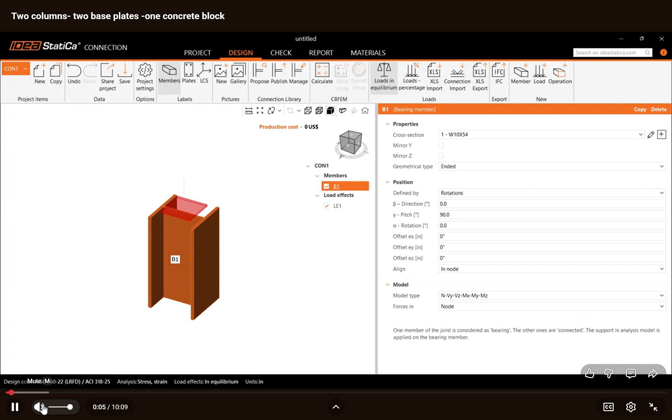This video will show you how to do that type of connection with two base plates related to a different column. So first of all, I'm going to create this channel.

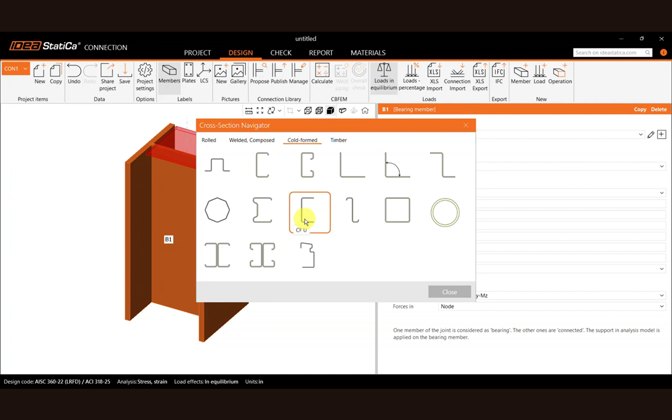I can use the cold-formed. It looks like it's a cold-formed. I mean, it's not going to select a cold-formed steel material, but at least we have some shapes here that you can use. I'm not sure about the exact dimension. I'm going to just use this one here, probably 8 and 4, but you can always change

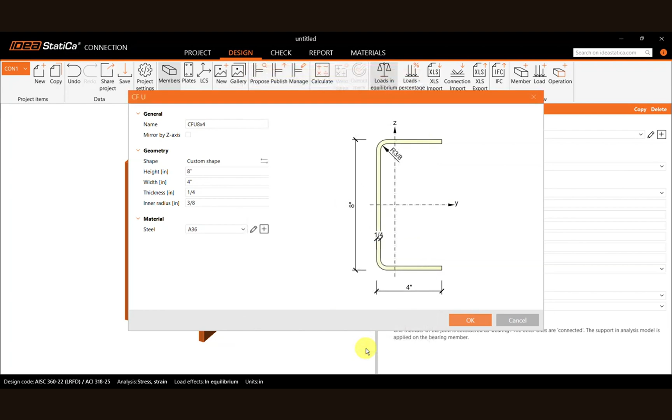this member shape, right? So you can also come here and select the appropriate material. I'm going to select A36.

Okay, so now we have this column here. So I'm going to copy this other column and I'm going to just rotate it. Actually, I'm going to use a mirror option. Okay, so both of them are located in the 0, 0 position.

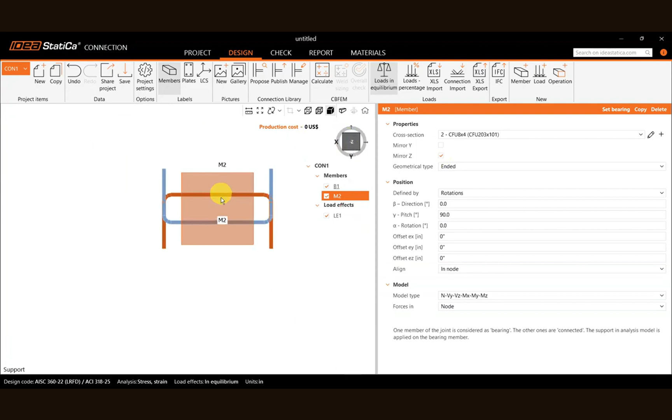So what we can do here is either if they have a space or they don't have a space, as shown in that picture, but you can just use this offset to move these members to one side and then to the other. So my recommendation is that the working point is always at the center of the two of them. So I'm going to move M2 2 inches and then B1, it's going to be -2.

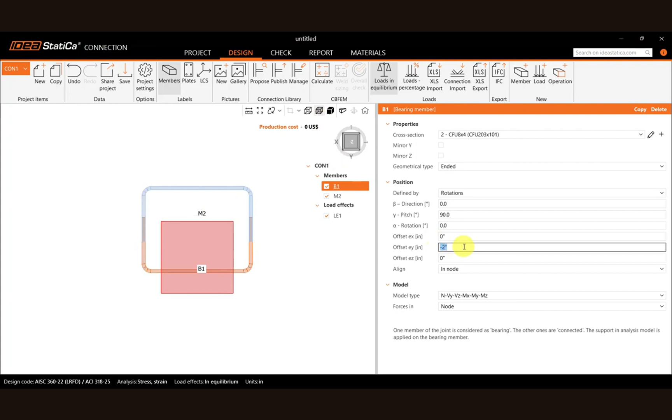So probably we'll need more, -4, and then the other one 4, 2. So depending on the space that you have there, but my recommendation is that we keep the working point in the center, okay?

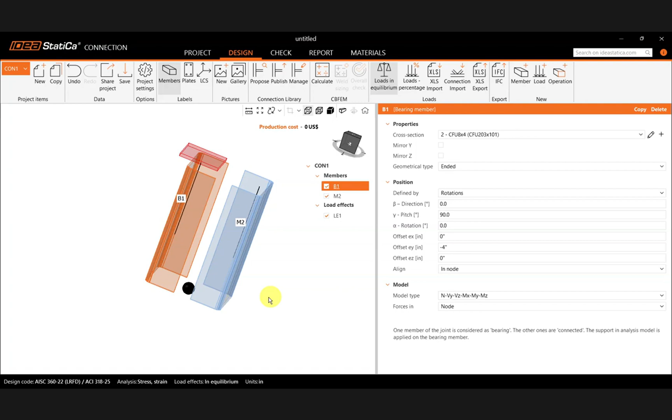So this is one approach to, let me go back here to the view, to have two different sections, but at the end of the day, one of them will be your bearing member, okay?

Here you have two sections. Then when you're in the load effects, you can add axial forces to two different sections.

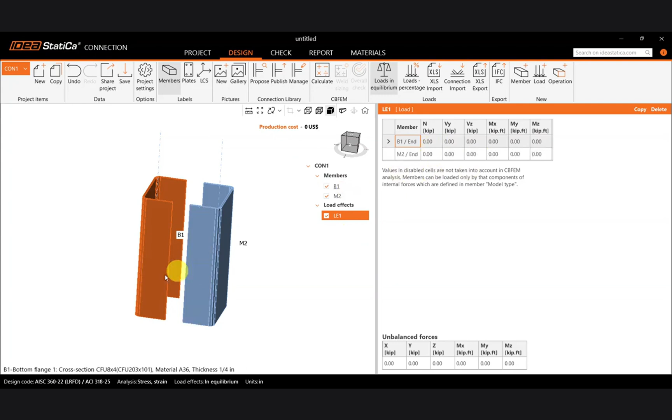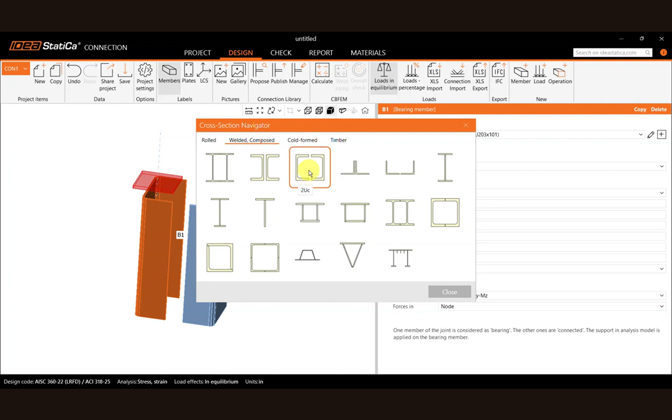There is another way, if you want to do that, to use this option here. Actually, you can almost use this option, which lets you create two channel members with a distance between them. So you can go ahead and select one of the predefined sections here, all right? And there'll be two sections, and then you can add a space like 3 inches.

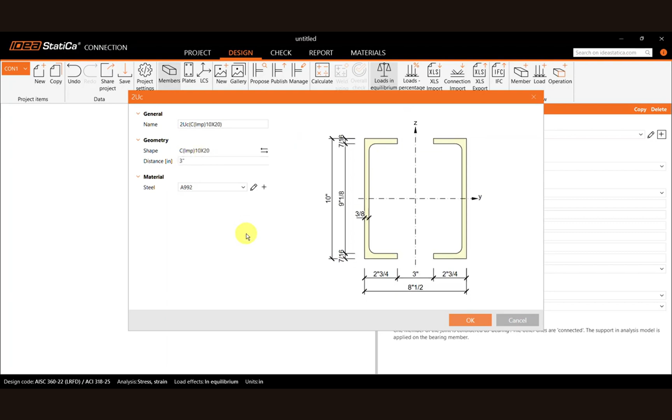So what will be the difference compared to the one that I am modeling right now? In this case, this section will act all together. So you will just add one load, or yeah, one axial force to these two sections at a time, right?

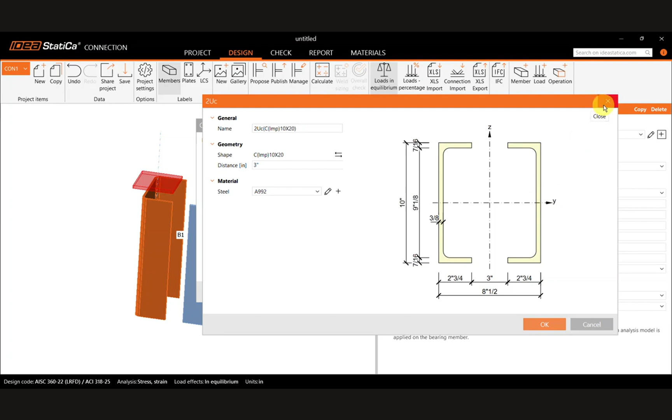I'll leave this decision to you, but in the meantime, I'm going to show you how to add the base plate to these two elements.

So as you probably saw, if you add a base plate to one member, then you cannot add a second base plate operation to the other element. So the workaround is to create this base plate from scratch.

I mean, one of them can have that base plate and then the other will be created from scratch, but I can create two of them from scratch.

So what you will do is create the plate, like in this case, I'm going to create this plate for, let's say M2 first, and I can say 3, and

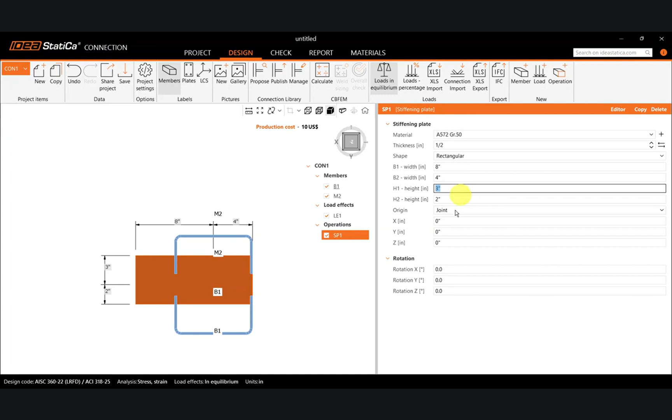actually I can relate this member to member local axis, so that will be in the center of, let's change it to M2 first, and then you can see that the dimensions are from the center of gravity of M2,